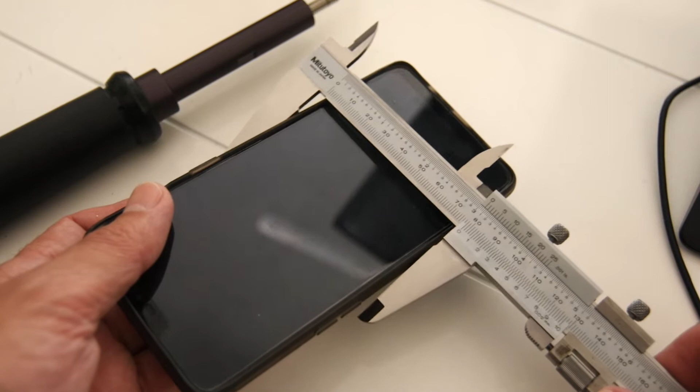I'm going to make the outer dimensions 25 millimeters in both directions, this way and this way. And my phone, with the protective cover on it, is 78 millimeters. So we've got 25 by 25, 78, and a 15.2 millimeter inner diameter for the hole.

So let's just start with a cube. I usually have my interface laid out like this so that when I'm making something larger I can gauge how it's going to fit into my print volume, but we don't need to see that. I'll also turn on screencast keys so you'll be able to see down here what I'm doing. And let's add a cube. The cube is 2 centimeters by 2 centimeters by 2 centimeters.

Now by default Blender's measurement units are in meters. I change them to centimeters because when I'm working on items or parts I'm making, meters is just too large. So if we have a look at my settings here, I've changed my length to metric in the units. Unit scale is set to 1, and yes, my grid floor scale.

Under the display in this numeric panel, which is available by pressing N on the keyboard. N hides it, N brings it back. Under the display tab, if I Control left click on that display item, it closes all the others and leaves this revealed. You can see I've set my scale to 0.010, and that brings my whole world down so that instead of my object being 2 meters across, it would be 2 centimeters.

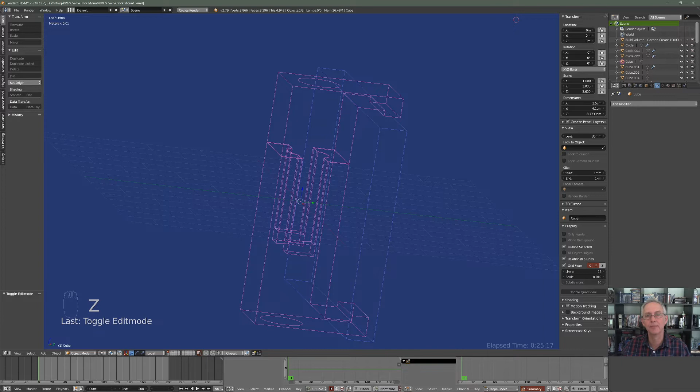Okay, so what's just happened is I've spent a fair amount of time making this up thinking OBS was recording, which it was, but it was just recording a blank screen. So I might go back and redo this, show you how I did it. I don't really want to. I'm just sort of running out of time.

So for this one, I'm just going to have to explain what I did, and that was just create two 20mm cubes and made them 25mm to fit onto this. For this shaft, I need a 15.2mm hole. I'm giving it 25mm outside dimensions as a cube to go over this shaft, and my phone will mount onto this like so with this bracket I'm designing here.

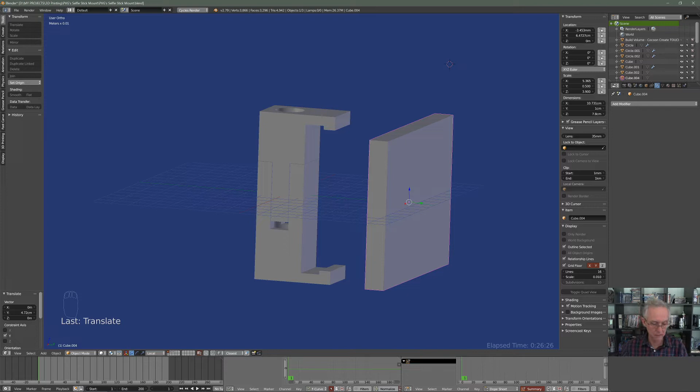I've designed it as two pieces so that one slips inside the other, and there's room here for the two pieces to slide into each other. It's very frustrating. I'm very sorry that didn't record. If I get time at the end, I'll redo this to show you what I did.

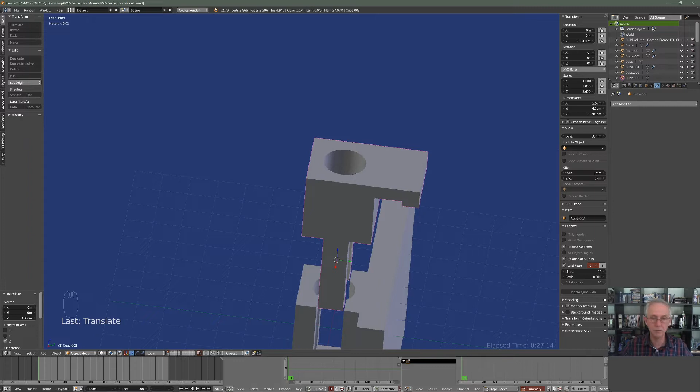I'm going to select those two pieces and make them separate pieces so you can see how that's going to work. Both of those will slide over this shaft and then clamp down onto the phone. Now I need a smaller hole at the top here, because this only needs a 7mm hole to put a nut onto. So I'm going to have to build in another cylinder, which I'll do now.

I'll make it 13mm diameter, and I'll make it have a depth of 5mm, and we'll press Alt G. I'm going to snap it to the top of this. Turn on my vertex snapping tool, G Z. Then it's snapped in there.

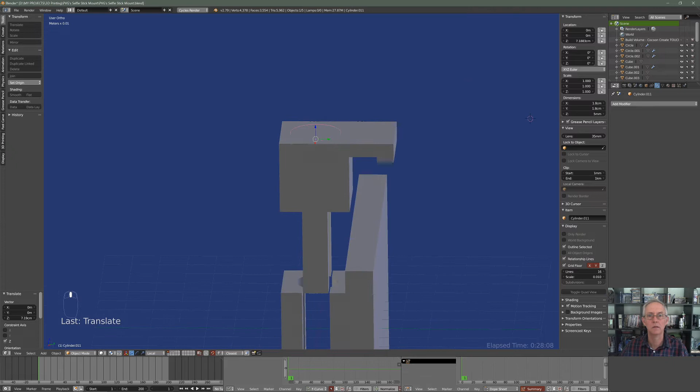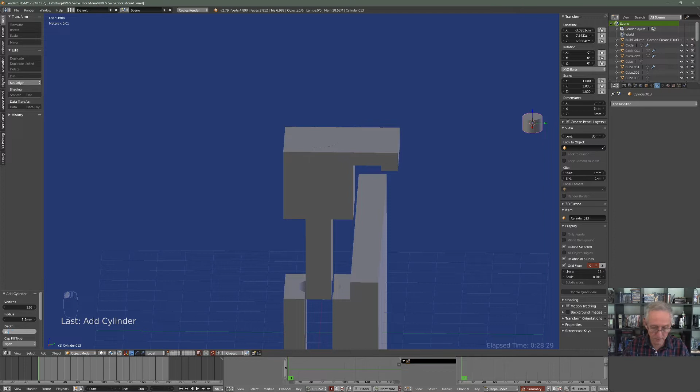I'm also going to create another cylinder, and this one will have a radius of 3.5mm to give me a diameter of 7mm, and the depth will be 5mm. Alt G, snap it back to 0, and I'll take it up there. Oops, turn off my snapping tool. I'm going to grab these two pieces and just focus on those.

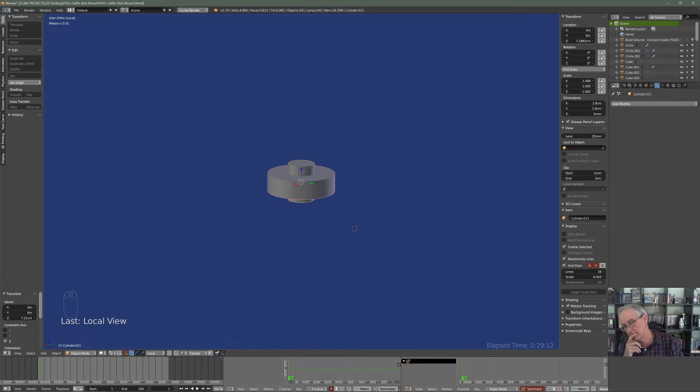The / key on a numeric keyboard will focus on what you've got selected, and / will take you back to where you were. So I want to take this piece out of this and then boolean this into the other piece. Is there an easy way of doing this? Or another way? I think this might be a better way actually. We'll go back out. I'll move them to another layer for now, so they remain in position. And what I might do is put some geometry in here.

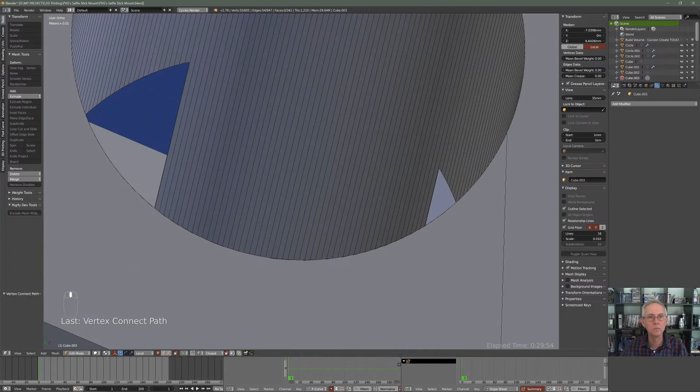First I'll see if I can join these two together. Yep, that'll do, that's fine. I'll do the same here, just pressing J to join those. So now I need to scale them to 0 on the Z axis, SZ0, and same with this one.

Okay, now I need to bring them both down to snap to these vertices so they're back where they were. They're a bit different, SZ0, now they're the same. Turn on my snapping tool, GZ, and snap to these guys. Okay, so now that's got geometry there.

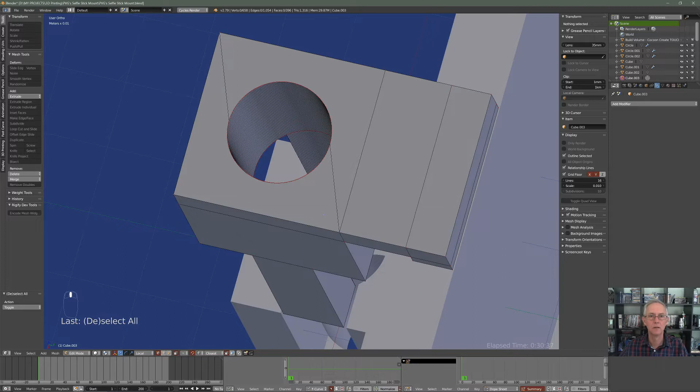So now I should be able to do a loop cut in here. I don't know why it's not joining up, but we'll have to do the same thing again, and join those, and join those.

There we go. Now I'm going to snap that to this plane here. GZ. Oh, okay. So now I've got some geometry which is holding.

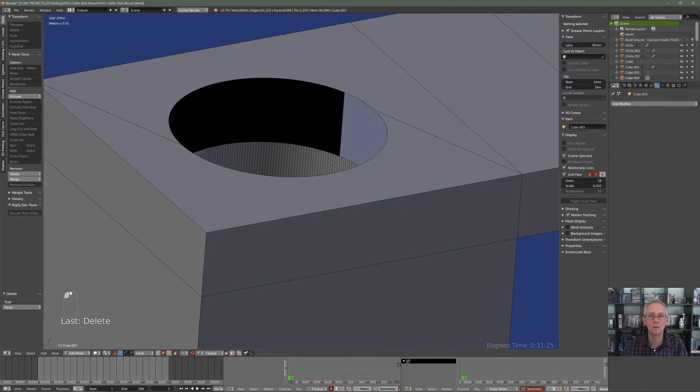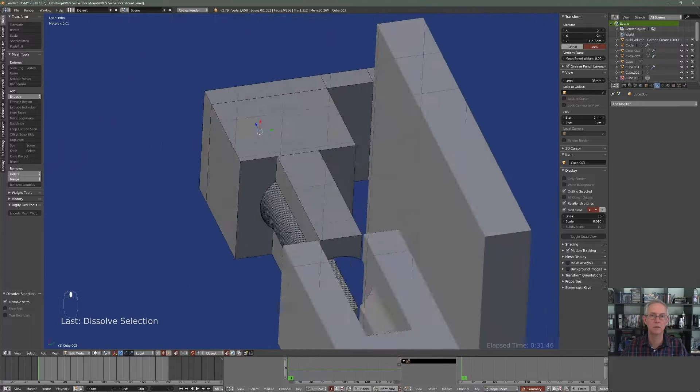What I can do is delete all these faces. And I can select that and fill that, and select that and this and fill that, which means I now can remove these. Control X. So I've got a clean face on top there, and if you're looking through here, there should be a face on here. So now I can just boolean straight through this, and that will work quite nicely.

Okay, so now I've got that. Well, I am going to make sure all my normals are facing in the correct direction. Something you should do when you've been jiggering around and putting geometry in and what have you. Make sure my scale is at 1 on that.

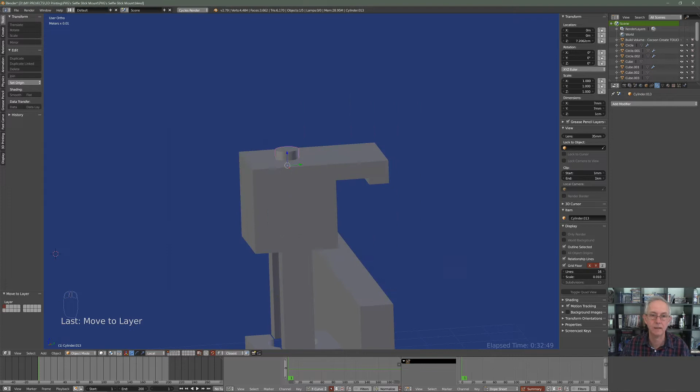I will now bring back my other pieces, or at least just this one here, and move that piece back to the first layer. That's going to be my tool for cutting out a hole in there. Again, just make sure I'm still recording. I am, thank you. And I'm going to make sure the scale's applied to this cylinder, select this piece, add modifier, boolean, difference, carve, and select this piece as my tool for cutting, and that's now cut it straight through.

So that will then sit on top here, and I can put a nut onto that and just lock it down. Okay, I'm going to apply that, and I can move that tool back to layer 4 so it's out of the way. So now we have our top piece which will lock down, and that should work quite nicely.

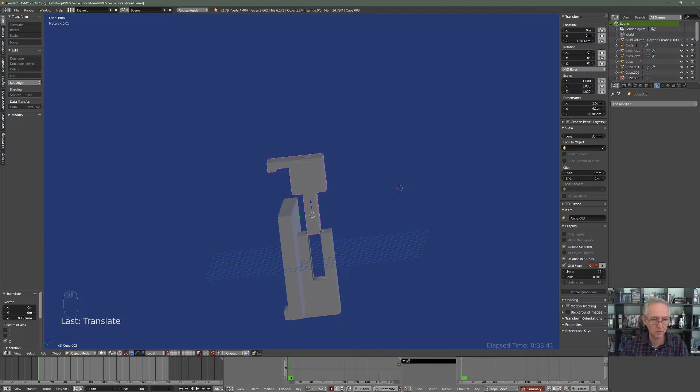And this is just a piece I've got in here to represent the phone dimensions. So it'll come down, whoops, turn off my snapping. It'll come down and just clamp down the phone like that, and I've got a bit of room here, so it will clamp down nicely.

Alright, so I think we're pretty close to being ready to print. I would like to make this look a bit more attractive. That looks a bit ugly, I think. So just going to round off a few corners. I think I'll round off these ones here. Yeah, I think that'll be enough.

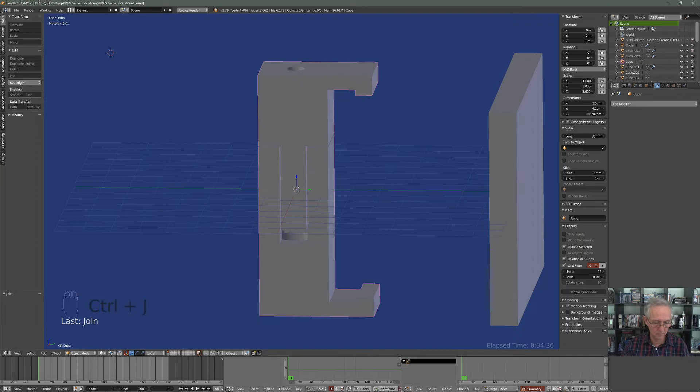Yeah, let's just see how that looks. Going to join together and apply to scale and select. Now I want to get, this is going to cause me a problem if I try to bevel. So what I might do is, yeah, I'll put a loop cut through here and a loop cut through here.

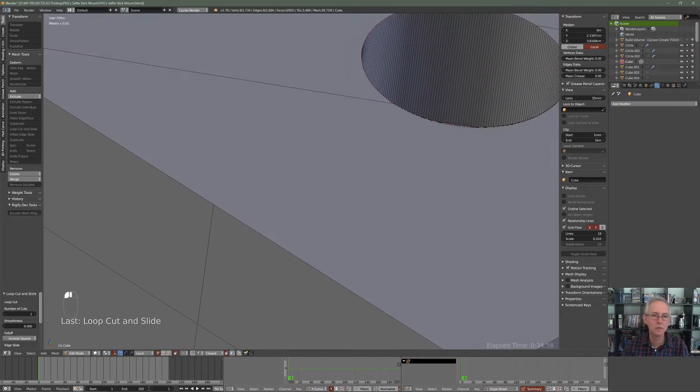And then we'll take this vertice, switch to top view, and we'll join that across the top there, which means I can get rid of this one, and we'll do the same here. Join that, which means I can get rid of this one, because that's going to hold that in place.

And I'm probably going to have to do the same down. Ooh. Yeah, I'll do it anyway. Just put a loop cut through there, loop cut through there, and I'm going to go Control 7 so we see the bottom view this time.

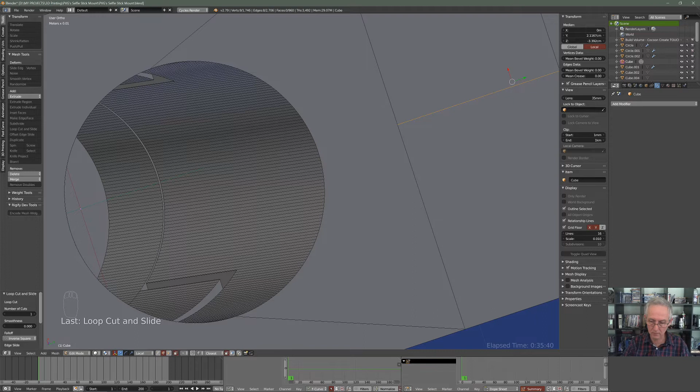Make sure I'm on vertices. Join across there. Yep, that's alright. Control 7. And go to there, join that. Okay, and so now I can delete these two edges. And that's cleaner geometry. Do a save.

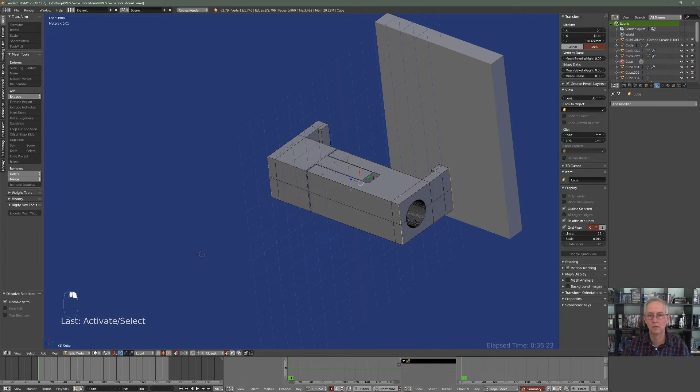So now what I can do is select these edges, and I might use a modifier to do the... I was going to just press Control B and permanently create a rolled edge on there.

But if I use a modifier, a bevel tool, and use weight on these edges, if I give those a weight, see if I drag that, it's going to give them a 10 centimeter bevel, it says there, but that'll be a different scale to what I'm working on here.

Let's make it a 3 millimeter bevel, and this is just giving it 100% at 3 millimeter. If I go 4, we should see a difference. No, looks like 3 is just max. Oh, got to clamp the overlap, that's what's happening.

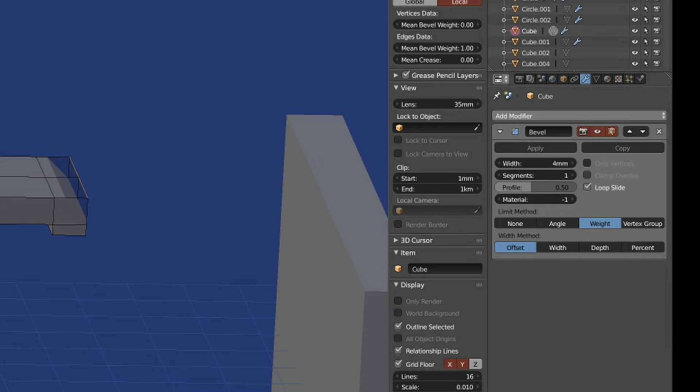Okay, so there must be overlap here somewhere. No, that looks fine. So I could go 4.2 millimeters and still be fine. And I can also then up the segments, we'll give it 36. And you see it's now put a nice curve onto that shape, which is adjustable.

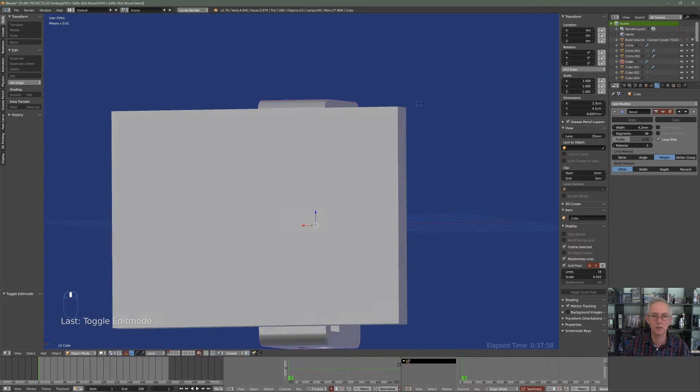I can go back any time and change that. Now let's have a little look. I think that's going to be a nice bracket, certainly going to be sturdy enough. My phone's not going to go anywhere. I'm going to just leave those edges hard inside there, so it's got a good grip. And yeah, I think that'll be good. So we'll print that, just double check everything.

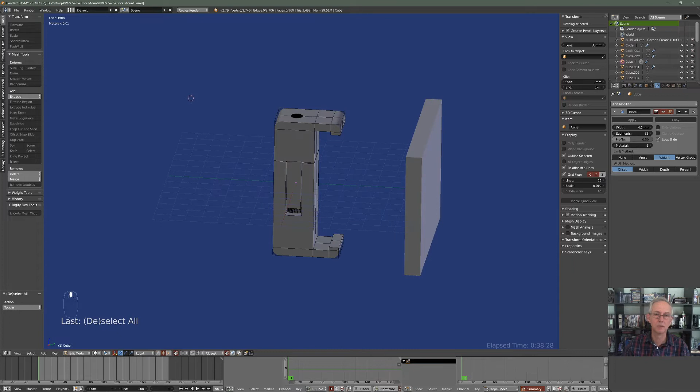No, I was thinking about separating them, but what I'll do is just duplicate that, move that to layer 5 so I can come back to it and make a change later, and apply this bevel now. Just looking at the sections, how many sections? I might update it a little bit more. 48. Make it 72, nice and smooth, and we'll apply that.

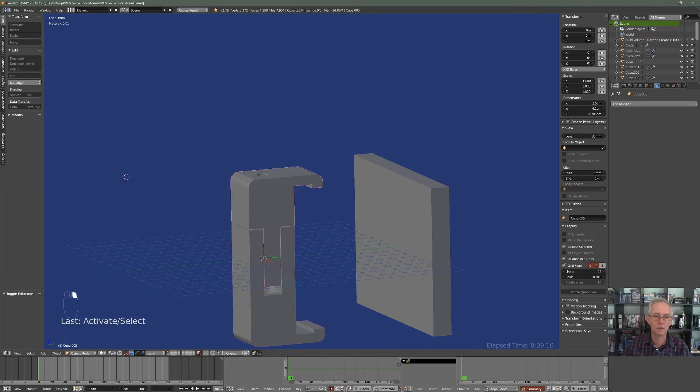Switch to object mode and apply. So now that modifier has been applied, I can deselect everything, link that, separate that off as a selection, and move that apart. Now printing, I think it's going to be easy if I just print them in this orientation as this piece is here.

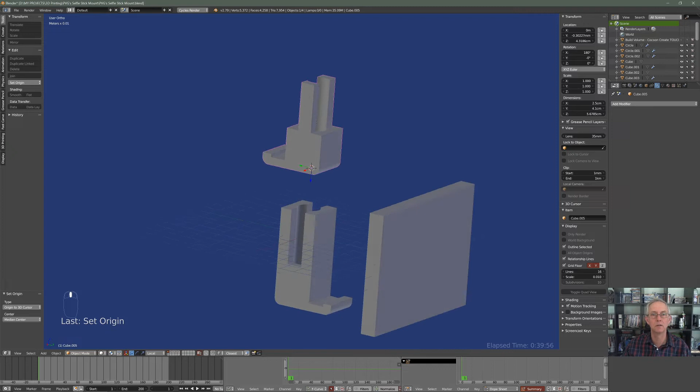I'm going to flip this one over, RX 180, and I'll make this piece, this plane here, the bottom. Going to move the cursor to selected, switch back to object mode, Control Alt Shift C, and we'll go origin to 3D cursor. I'll do the same for this piece here.

Now this is not a tutorial like that I'm expecting you to follow along. This is just showing you how I do it, and you might pick up some little clues on how you can speed up your own workflow.

Now if I press Alt G, that'll snap to the floor. Alt G, so will that, and I can print them as 2 separate pieces or 1 piece, or whichever. And I think we're ready to go, and that's our bracket for holding the phone on. So let's delete that, let's take this out to Cura.

I did try Cura, actually I'm still recording. I did try PrusaSlicer. I've been using Cura up to Cura 4.2, whatever it is now, and I did try giving PrusaSlicer a go, and I initially was very happy with the way it was slicing and the speed it was printing at. But then I did notice that I did a print in Cura 4 and a print in PrusaSlicer, and I'll zoom in and show you what's happening here.

But for some reason PrusaSlicer doesn't hold the same fine detail that Cura does, and I don't know if you can see these sections in here. This is the SpaceX Starship, by the way, which I modelled. These sections here hold up

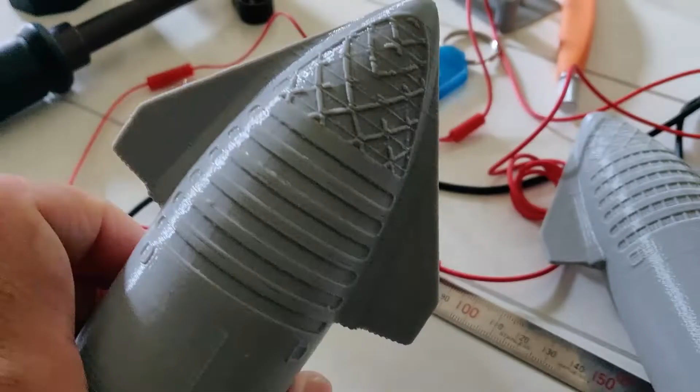in Cura, but they get lost in PrusaSlicer, and it's the same STL file that I loaded into both slicers, and I can't find settings to increase the resolution of the slicing software, because the resolution, it's all in the STL file, all that information's in the STL file, but PrusaSlicer just sort of seems to disregard that fine detail. So this is the PrusaSlicer,

and this is the Cura slicer. You can see there's a fair bit of difference in detail that's been held up in Cura that's been lost with the other slicer. And it's definitely in the slicing software, because I slice it and have a look layer by layer, and the detail's just not there, where it is in Cura. So if someone knows of a setting that will fix that, let me know, and I'll have another go. But yeah, I was quite surprised that I could not get PrusaSlicer to hold the detail that I can in Cura, so I'm going to stick with Cura for now.

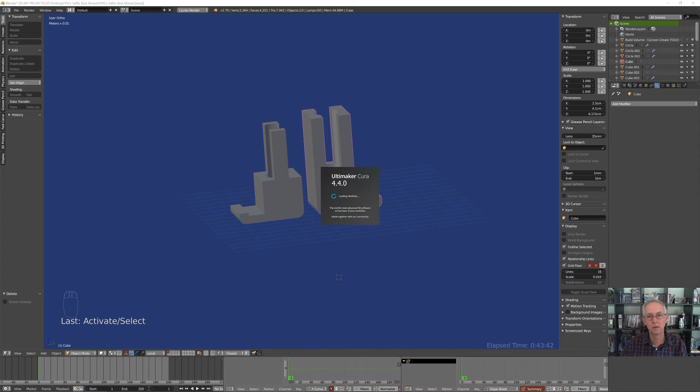So let's take this out to Cura. Sorry, it's Cura 4.4, I thought it was 4.2, but 4.4 I'm up to now. And just double check, make sure I'm still recording. Good. Now I'm going to export, I'll export them as separate pieces. So we'll go File, Export STL. And if you come down here, I want to make sure my selection only is ticked. My scale is going to be 1000.

My export scale, I'm going to work on scene units, and I definitely want to have selection only, and it's going to apply any modifiers that haven't been applied. So we'll go selfie stick, part 1, selfie stick mount. Export that, and we'll go File, Export STL, part 2.

I'll print one at a time, just so I can see how it's going. Now we'll import that. Open file.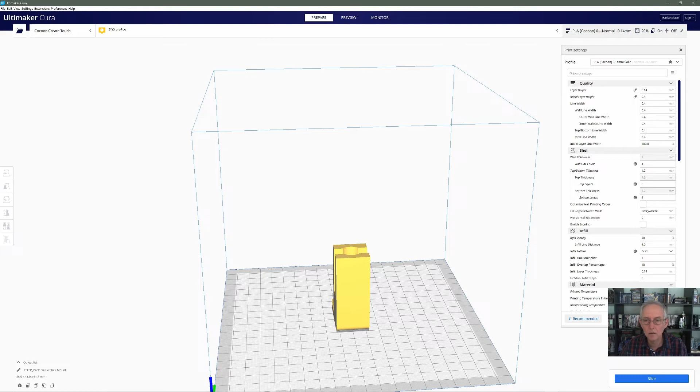I'm going to want a bit of... I'll print it at 0.1. We'll go 0.16, and we'll do 4 wall lines, 4 walls for strength. Infill density, let's up that to 30%, again for strength. Printing temperature is 200, and no supports necessary. Tick that off.

Alright, so I'll just scroll down, and you can pause on this screen if you want to see all my settings that I'm using in Cura 4.4. So that section, again pause it if you want to see what those settings are. This is going to my Cocoon Create Touch 3D printer, and that's the last section there.

So let's have a look at this. We'll slice it. Oh, there's one other thing I do too.

Select the part. I changed my scale because I did a bit of a calibration test on my Cocoon Create Touch, and I just printed this little scale grid, which is 180mm from here to here on the X, and the same on the Y, and printed it out and then measured it to see if my print is 100% accurate. It's particularly crucial for parts that have holes at set distances apart. A little bit makes a big difference.

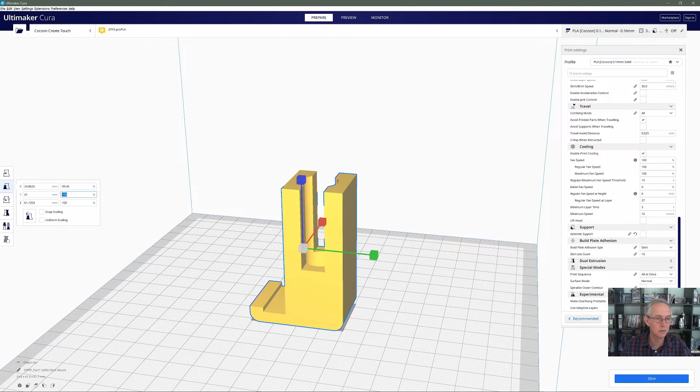So I've done that, and I found that my print is out on the X and Y axis, and I need to set my scale to 99.45% on both those axes to bring it out at the correct scaling. So 99.45 on both those axes, and when I print that I know it'll be the right size, or the size as I modelled in Blender.

So check that. Okay, slice. 2 hours 17 minutes, that's fine. Let's have a look, see if there's any issues anywhere. I think that's looking good. Should print fine. Alright, that's good. So that's part one.

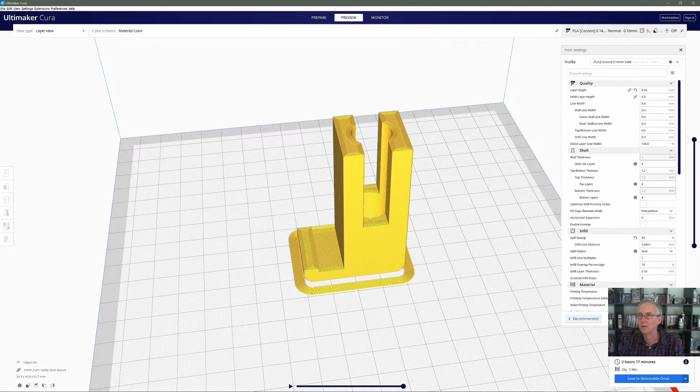I'll save this profile, and we'll call it 0.16, not solid, 30% infill. So 0.16, 30% infill, so we've got that as a preset.

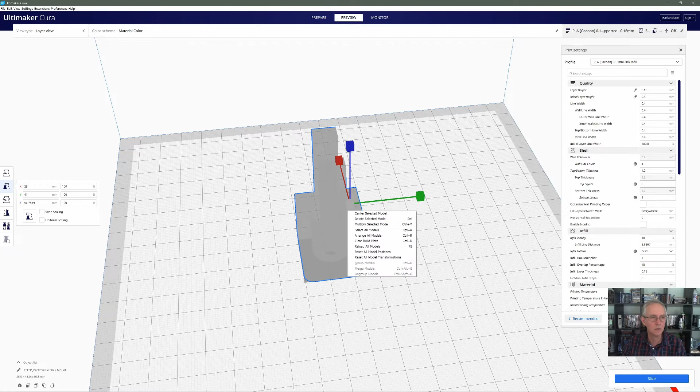So I've got a new project, yes, and I'll open that second part. Scaling will be 99.45% on the X and Y for my printer. And what I'll do is I'll put this

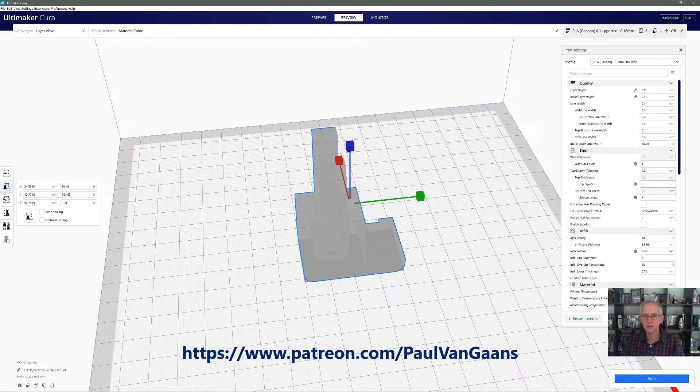So, but anyway, let's get back to this. I've changed the scale. Let's slice that. All my settings should be the same as before. Slice that. And we'll just do a little check. All looks good. Yeah, this is the top, so it's a smaller. Should print nice. Alright, we'll save that.

And we're ready to go to print. So let's head over to the printer. Actually, I think this is going to work out well, this system. So I can show you stuff that's been happening as I go, because like in this instance here, you can see this, all these bits of filament. Just this roll that I've got of it's the Cocoon Create PLA.

I'll do a print, and then the next day when I come back to the printer, it's snapped off, and it just keeps snapping off into pieces. It's weird. It prints okay. It'll do a run and print no problems, but then overnight it just snaps off into pieces, and I've got to then remove it out of here and load more filament.

The problem is I've got loads of this filament, and it's the only filament I have, which is a Cocoon Create filament. So I suspect it's the filament. I don't know if it's just an aged batch, because it's very stiff and it's tightly wound onto the spool. I don't know what it is, but I'm keen to try some different filament and see if that's going to be any different.

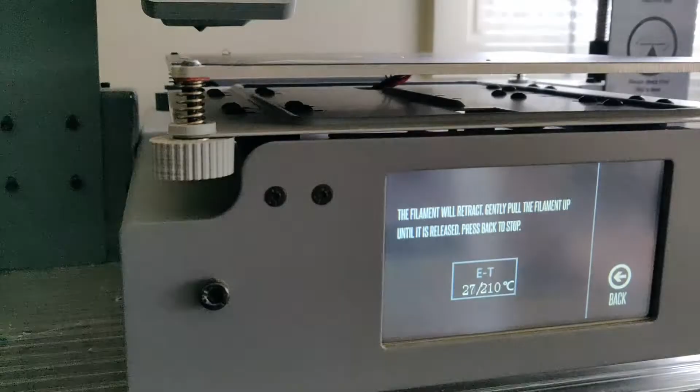Alright, so let's load up this SD card and get a print going. But first, I need to fix this filament issue. So quick menu, that's not the one. Change filament, remove filament. I'm going to set to 210 degrees, and while that's warming up, I might just show you my settings for the start and end G code that I now use for this printer.

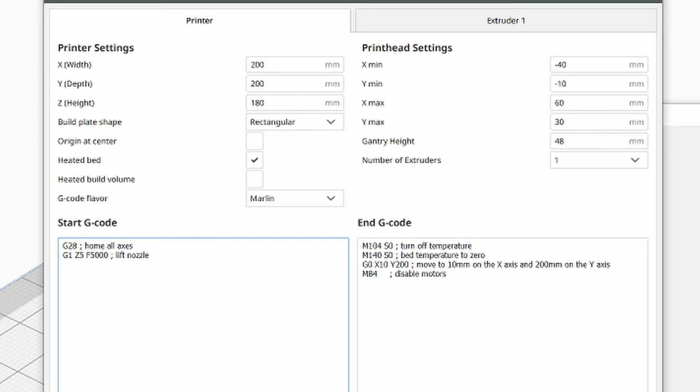So my G code, let's see if I can find where it is. Manage printers, machine settings. Okay. So you can see now my start and end G code is pretty basic, and I don't know if that's a good thing or a bad thing, but I just find it's a much more efficient way of finishing a print and starting a print. It's just a lot quicker than the G code that came with this printer. And I'll show you when it's printing where the bed starts and finishes, and I like it so much better the way it's set up now.

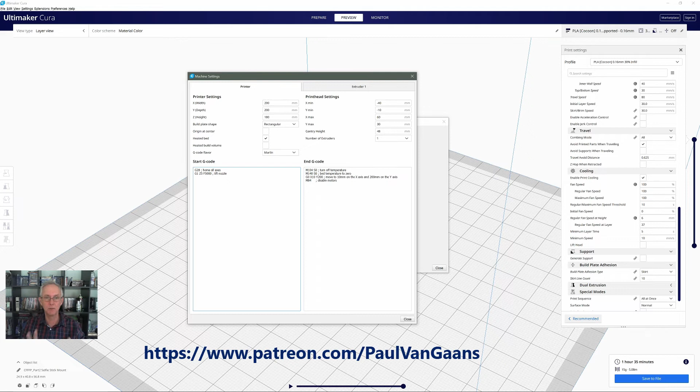So I'll put the start and end G code up on Patreon, just as a text file, so that you can try it yourself, but try it at your own risk, because it works on my printer and it may not work on your printer. It may send the head off in different directions, so just be careful. But yeah, this is the G code I'm using, and I just find it's so much more efficient.

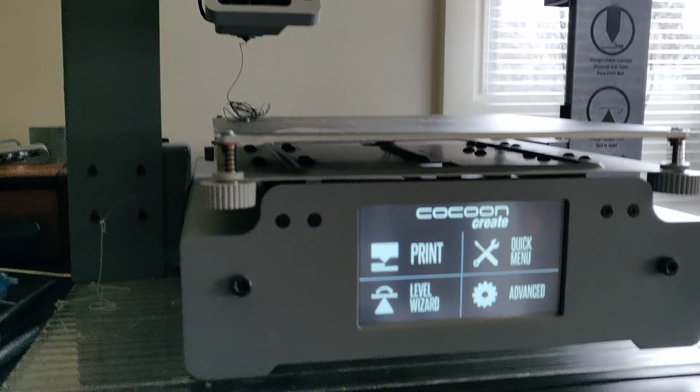The filament is now extruding out of the print head, so let's go back over here and get that sorted. Now, I've been having some issues with this touch screen, or this printer, of late. I've had issues with the extruder and nozzles, which I've replaced. But when I hit print, you might see it here. See this little glitch on the screen here? It started doing this a little while ago, and sometimes if I print, we'll do part 1 first. Part 1, the selfie stick.

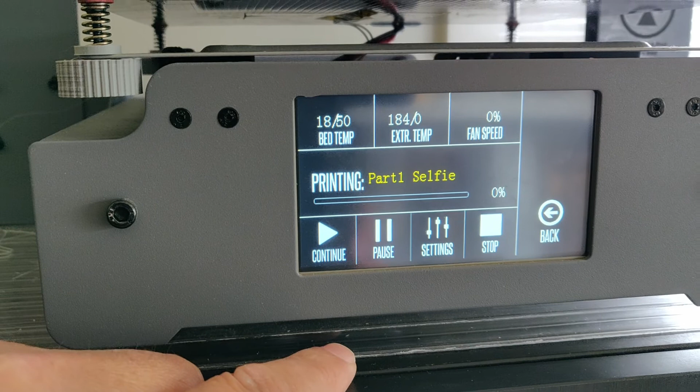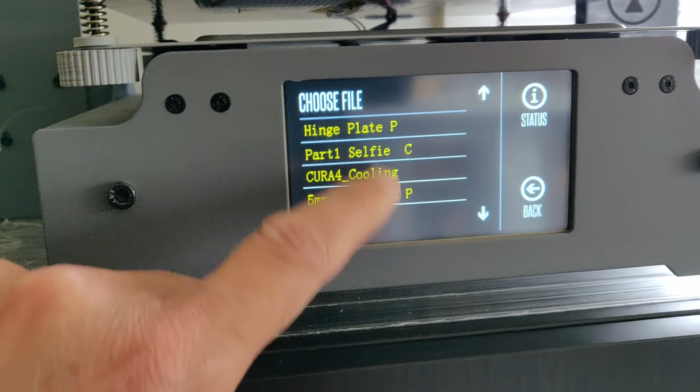There you can see, the extruder temperature is not going up. The bed temperature is set, but the extruder's set to 0. So what I need to do is press stop to cancel the print. Print, go status, stop that again. Print, try part 1, and now my temperature's reading correctly. So I don't know, it's just a glitch that's sort of crept into it.

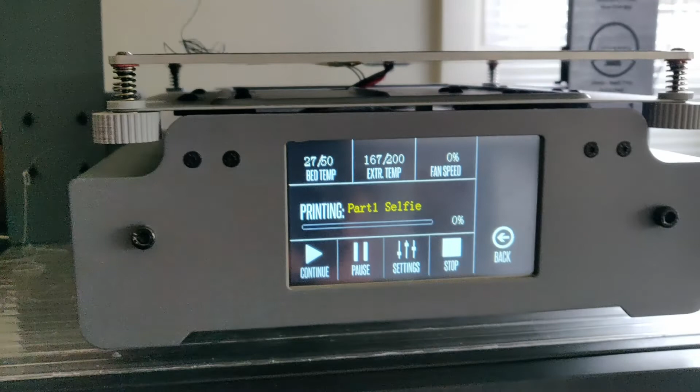It works fine from there on in, but every time I do a new print, I've got to do that to clear things. It's one of the things that is playing up a little bit, but it's not enough for me to worry about sending it in to get fixed or anything like that. I'm happy to live with that. That doesn't worry me, but it's just something that's crept into it.

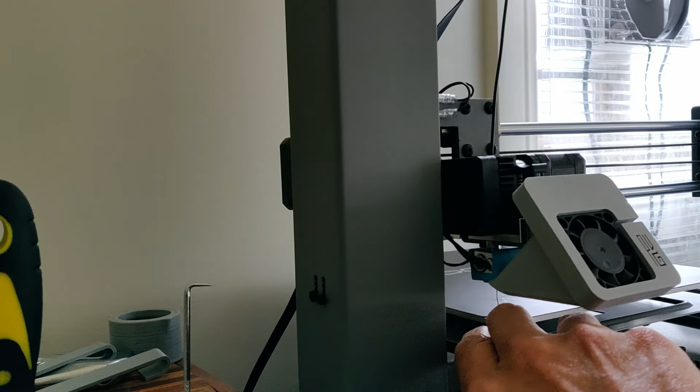So that's going to be ready to go in very short order, so I might just give the bed a quick go over while it's at 42 or 50 degrees, just with a bit of isopropyl alcohol. Got that in. Now you can see there, the G code I have, it just basically comes over, gets itself sorted, started, and then goes straight to print.

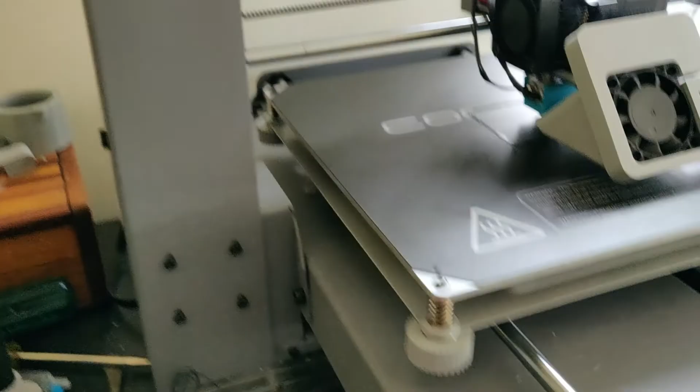And when it's finished, it positions the print head over here with this new G code, and just spits the bed out here so that the part's really easy to get off. Prior to that, the print bed would go to the back of the printer, your part's going to be back in here, and then the print head comes all the way up to the top. So I think the G code I'm using now is much better. I like it a lot. So let's print away, and I'll come back in a bit and we'll see how it's going.

Righto, now that's printing nicely. Let's head back over to the computer and I'll show you that shoe project I was working on. Okay, so this is that shoe I was talking about, which is this one here. And as you can see, there's a fair bit of detail that went into making this shoe. I don't even want to count how many polygons or vertices are in here.

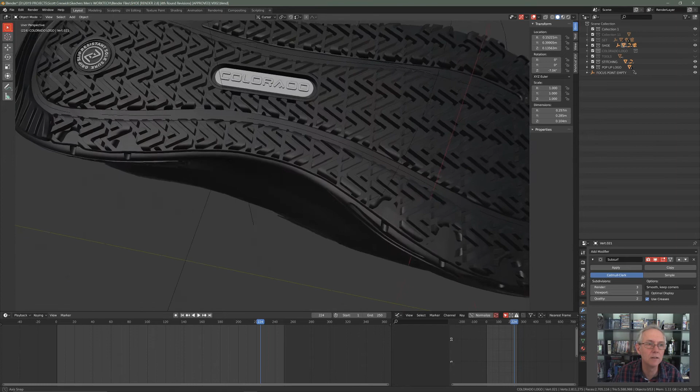I actually had to create a virtual set as well, and I'll show you the finished rendered look in a minute. Let's just turn off the set so we can just focus on the shoe. And you can see there's a fair bit of detail gone into this. And for the final render, even though you can see the polygons here, I had them set up to a higher value for rendering, so they were all smooth. So as you can see, there's a fair bit of detail in this.

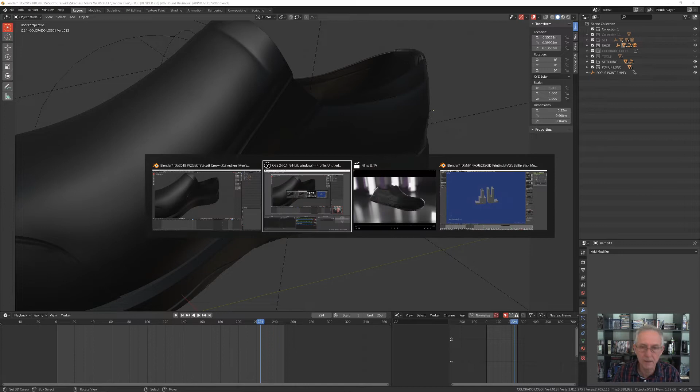Let's have a look. This is what the final render looked like, and the animation. It was just a small scene that got cut into a bigger commercial, a live action commercial. It just was a close-up of the shoe. And I really had to build everything on the shoe, including recreating these textures and the leather texture and the webbing on the shoe here, which was a little bit of a challenge, but we got there. So yeah, that's one of the projects I've been working on.

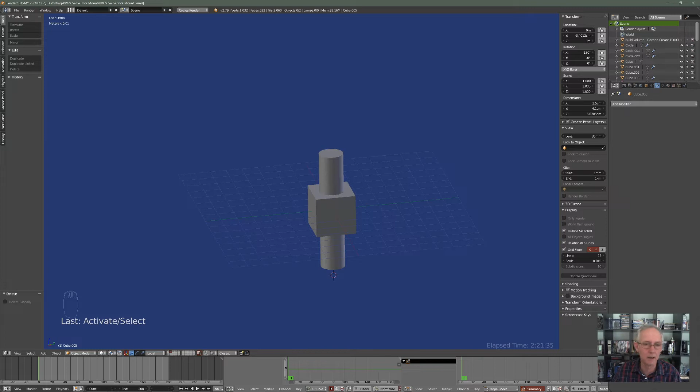I don't think I'm going to have time to show you the steps that led up to this point, but it was basically I created a cube first and then a cylinder, used the carve Boolean modifier to remove this geometry out of the cylinder, and then created this piece here, which was just a piece to cut out a slot shape so that the two parts can move independently.

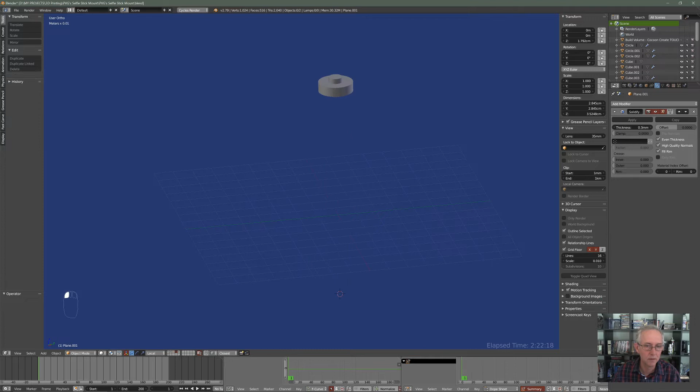It's just a flat plane with a solidify modifier on it, and you can see that if I turn this modifier off, it's just a flat plane, that's all it is. And so then I used that to Boolean this into two parts, which gave me this shape. So that's all I did for that there.

I will do another video recreating exactly what I thought I was recording earlier, but I'll do a different model. I'm not going to have time to do this today, but we'll do the same format on another model, and I'll run you through all the steps I used to create something like this, so you won't miss out. But for now, I'm sorry that I lost that footage. Well, I didn't lose the footage. I thought it was recording, but it was recording a black screen, so it's got my voice, but no vision.

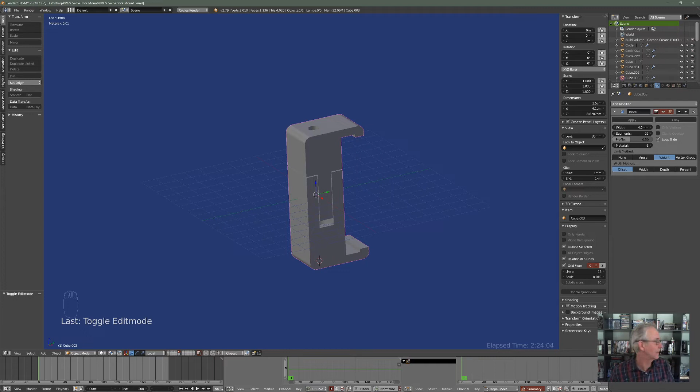All right, let's see how the print's progressing. So that's it. So really, all I have to do now is just wait. I'll print the second piece once this one's finished printing, and come back to you once the part's ready to go. So this is the final product, and I must say I'm really happy with the way this came out. The print finish is really nice. The tolerances are all perfect. I can't fault that. Everything fits together nicely, and it functions fantastically.

When I put a phone in it, I don't have to back the knob all the way off. I just have to loosen it a little bit, slide a phone in, and it's good to go. I will show you that in a tick. It'll be one-handed because I'm holding the camera with the other hand, but at least you'll get an idea of how it goes together. So it just slips together. I did model a knob for this nut at the top of the unit, and I will play that video at the end of this. So if you want to see how I modeled that nut, stay tuned for that.

I was originally going to have a captive nut that was embedded in the knob. Just pause the print, drop the nut in, and then keep the print going. But in the end, I decided on the simpler approach, and it works fantastic. I only have to back the knob off a little bit to slide the phone in. So overall, I'm very happy with the way this works, and I've been using it a lot, and I will be using it in future videos for this and some of my other channels.

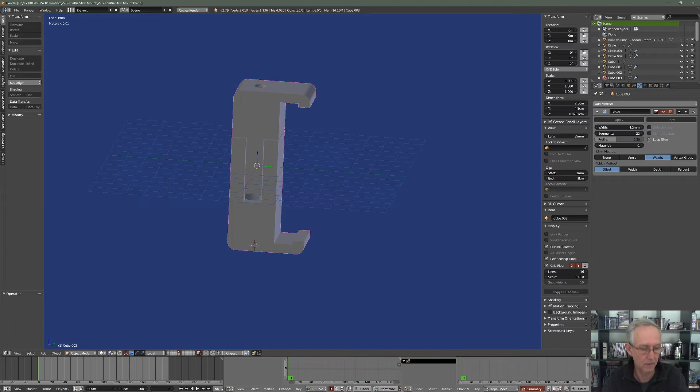First thing I'm going to do is we'll work on this layer, which is layer number 5. If I mouse over, you can see down there it's telling me it's layer number 5. So we'll switch to that layer, and I will measure up this nut that's on top of this mount. I'll use my calipers rather than that small ruler.

The nut is 11 millimeters by 11 millimeters. Now, I don't think that hole in the center of that nut is exactly in the center. It looks to me like it's slightly offset. So what I'm going to do is to just give a little bit of clearance around the sides of that nut to ensure that, if it is a little bit off center, it's still going to fit in there all right.

If I make it 11.5, the actual square shape inside the knob to hold that nut is going to be 11.5 by 11.5 millimeters. And for the outer diameter of that knob, I'm just measuring diagonally across that square nut to make sure I've got plenty of room for my outer walls. Let's make it 21 millimeters. I think that should be fine.

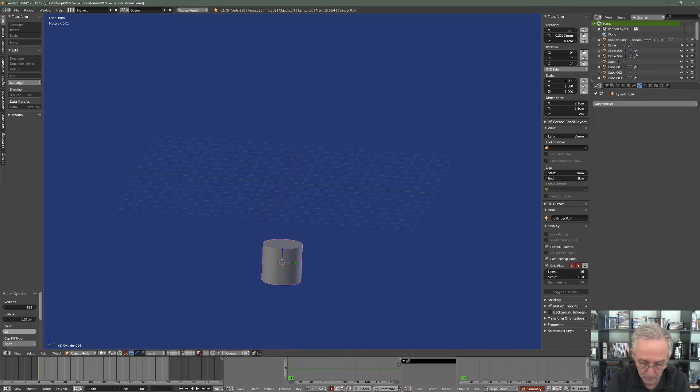So it's quite a simple one. Just going to create a cylinder, and I've got 128 vertices, so it's 128 faces around the edge of the cylinder. Radius is going to be half of 21 millimeters, so that's 10.5 millimeters, and the depth I'm going to make it 20 millimeters, just to give us a little bit something to hang on to. Okay, Alt G to snap it to the center.

And now I need to make sure I've got, I'd say, a millimeter of base in the bottom of that. I'll make it 2 millimeters in the base. So let's create our shape now for the boolean to cut out of the center of this. We'll create a cube, 11.5 millimeters by 11.5 millimeters, and Z can be 2. And this is going to cut out of this shape.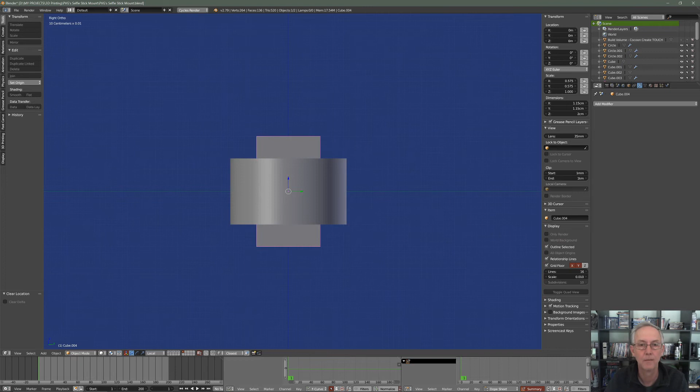I'm going to make this face the pivot point of this object. That's currently set to the center. So I'll go to faces. Actually, I'll turn on screencast keys while I'm working so you can see what I'm doing. Select that face, Shift S, cursor to selected, switch back to object mode, and I press Alt Control Shift C, and that's origin to 3D cursor.

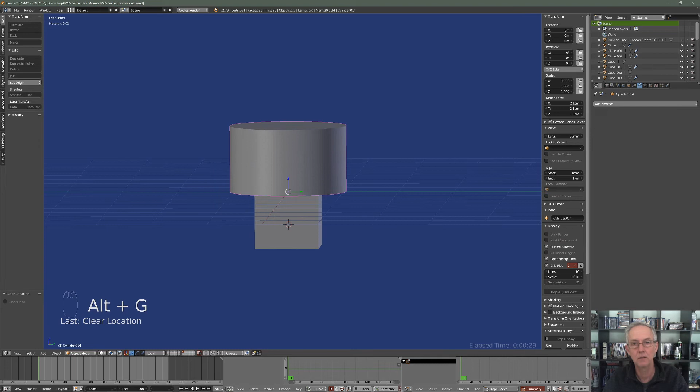So now that pivot point is at the base of that cylinder. If I press Alt G, it's going to snap that to 0. Now I can do the same with this shape. Shift S, cursor to selected, back to object mode, origin to 3D cursor, Alt G. So now they're both at 0, 0. Now I can just nudge this up 2 millimeters to give me my inner floor of this knob.

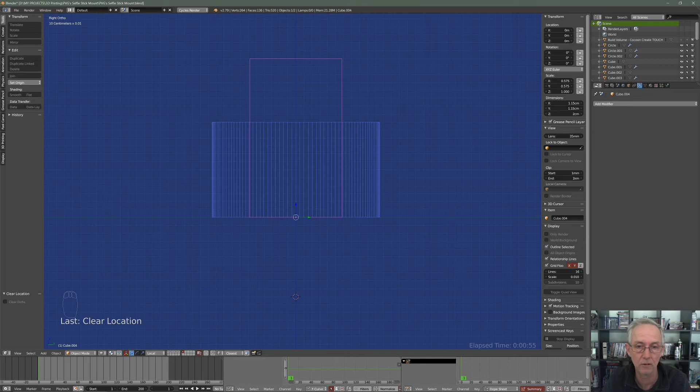So I'm going to press G, Z to snap it to the Z axis, and move it 0.002, which is 2 millimeters on my setup.

And I went 0.002 because, if you come down here to your numeric panel, you'll see I have my display set to a scale of 0.010. By default, if I create a cube, it'll be 2 meters by 2 meters in Blender, and I want my default cubes to be 2 centimeters by 2 centimeters. So I set my display scale to 0.010, which means that when I create a cube, it's 2 centimeters by 2 centimeters. That's the sort of scale we're working with on 3D printers. We're working in centimeters, not meters, so I just do that by default.

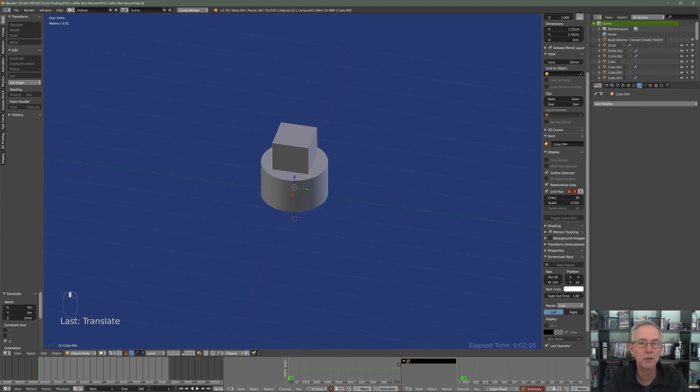So now I have that shape there. Let's boolean this cube out of this cylinder. I'm going to add a modifier, boolean, difference, carve, always use carve boolean modifier, select my cube and hit apply, and I can delete that now, and that's the shape I'm looking for.

So my nut will just drop in here, and when I twist it, it'll twist the nut, and it can't come out once it's onto the thread. So that'll be fine for what I'm looking for, because I never fully take that nut off when I'm adjusting this mechanism. I usually screw the nut up to about here, and that's all I need to slip my phone in and screw it back down again. So that's going to work fine.

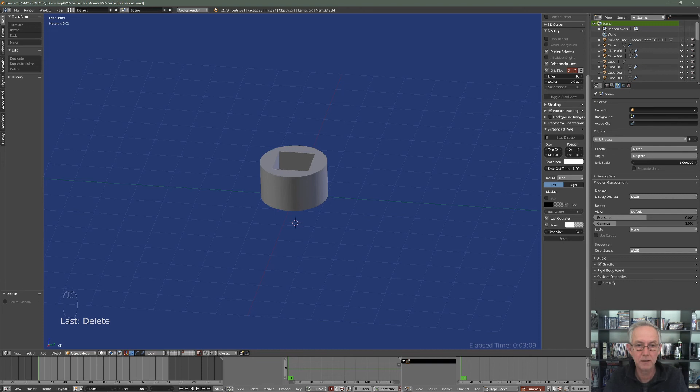Now I need to put a 7mm hole in the base of this, so I'm going to create another cylinder, and its radius is going to be 3.5 millimeters. Snap it to the center, and I will just make sure I've applied the scale. It was fine, but just in case, because sometimes when you do a boolean, if the scale is not at 1 for each of these objects, you can have issues. So if I was to create this shape, scale it to this size and then boolean, I could have problems if I don't apply the scale.

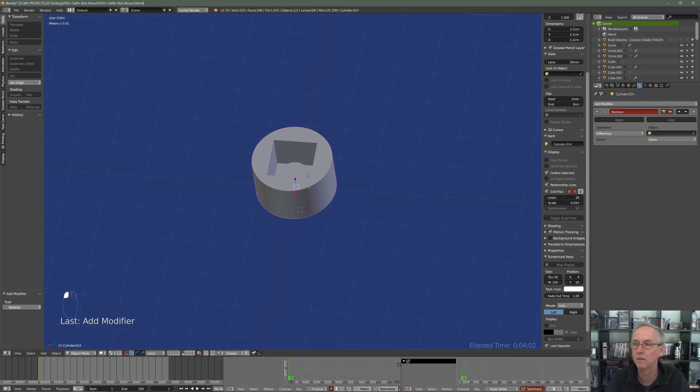So we'll do another boolean operation, difference, carve, and select the cylinder. And you can see that's been cut out of there. Apply that, and I can delete that as my tool. So that's what I'm looking for.

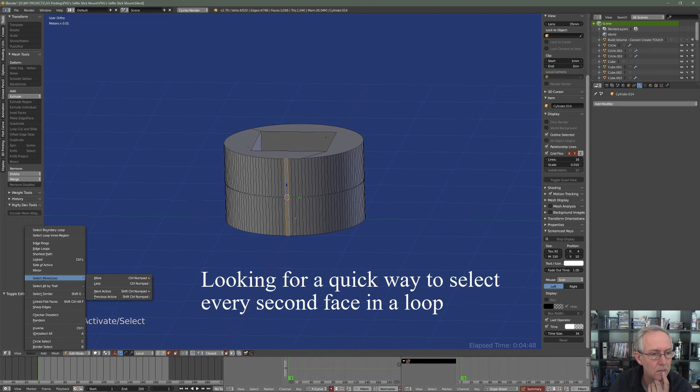Now, to give it some grip, I might extrude some of these faces. I was hoping there was a way I could just select every second face in the loop, but it's looking like I can't do that. Or can I? No.

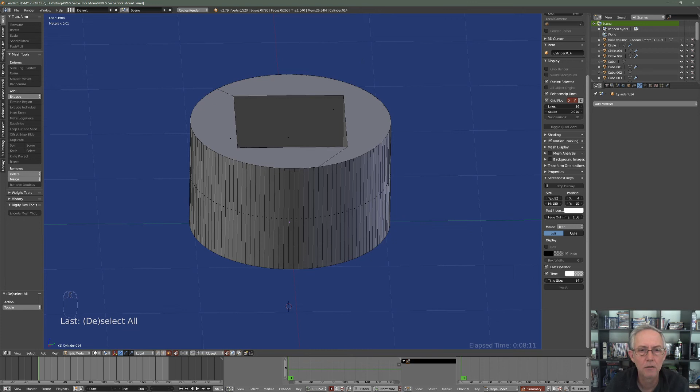I want to create some ribbing on the side here. So let's see how this works out. I'm going to select 3 faces, skip 1, 3, skip 1, 3, and so on, and I'll go all around the edge doing that. Lucked out there, that works out perfectly.

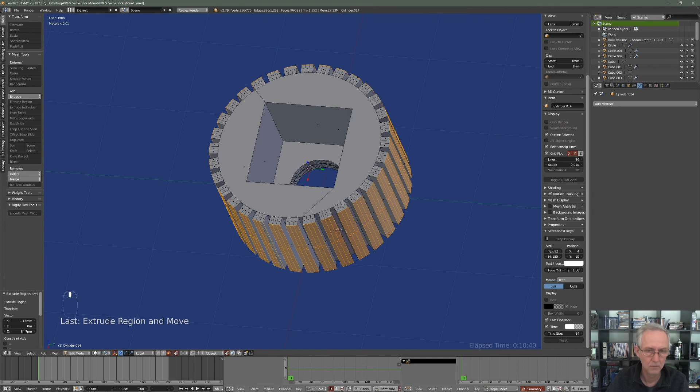Okay, so with those selected, I'm going to click extrude region and just extrude those out. That'll give me a little bit of grip on the actual dial. That's probably a bit too much, so let's back that off a little bit. I'll go back to median point, S, Shift Z, and I think that's fine. That will give me a little grip on the knob when I'm turning and tightening. Alright, let's print that and see how it looks.

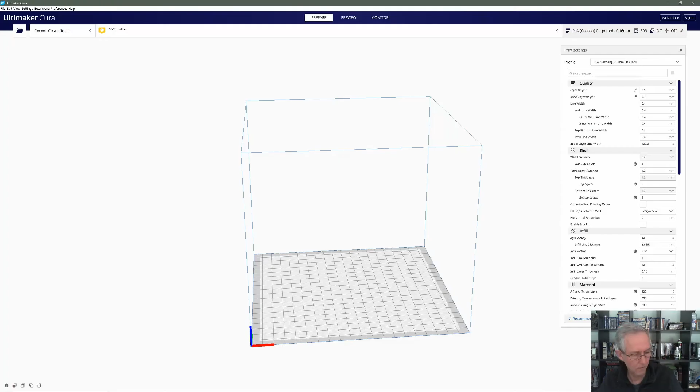So we'll take that out to an STL file, selection only, scale 1000, and scene units ticked, and we'll call this knob for selfie stick. Export that. Now with Cura loaded, let's open that file, the knob, that's it there.

I'm going to adjust the scale to 99.45% on the X and Y. You don't have to do this. This is just for my printer. It's a little bit out on its scaling, and this just corrects it to make sure that it prints 1:1.

And I'm going to print at 0.16 layer height, and infill I'm going to make 100%. I want this to be solid. Let's slice that. 28 minutes. And that's how it's going to look. Yep, that's all holding up nicely.

That should print fine. So I'll save that to file and print that, and I'll just show you my settings so that you can freeze frame if you like and see what settings I'm using to print this particular piece. Okay, let's print it.